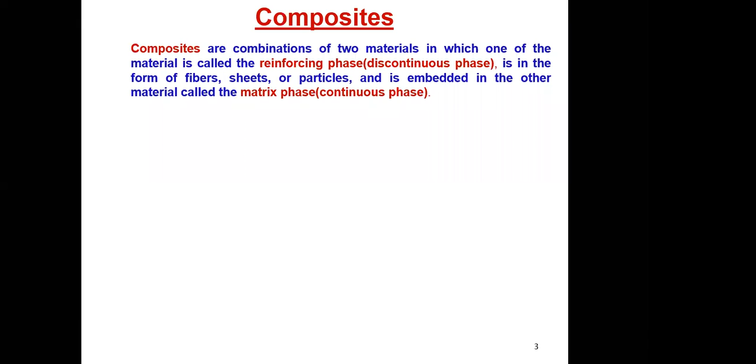So what are the functions of the reinforcement and matrix? We should know all these things before going through this presentation. Basic concepts should be clear. So I will explain the components of composite materials. Firstly, the reinforcement. Reinforcement may be glass, carbon, organic, boron. I think you have heard about glass fiber, Kevlar fiber for the military industry. These materials are used in aircraft industries also.

So matrix material, what is the function, what are the properties of these components? It is also a very important thing. Matrix may be polymer, metal, or ceramic, but my work is based on polymer based composite. So I will give a brief description of polymer based composites.

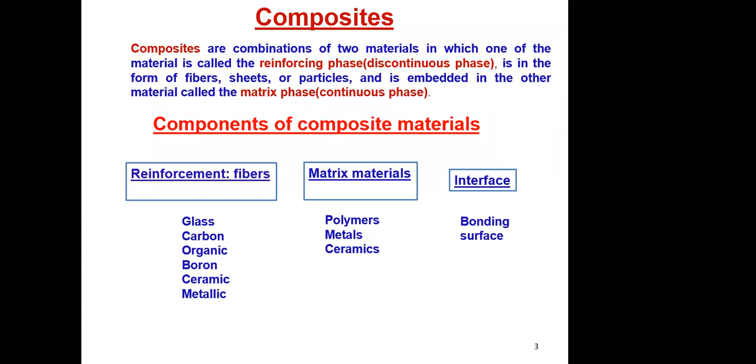So firstly we should know the function of the reinforcement. The main purpose of reinforcement is to increase the strength and stiffness of the composite. As for the matrix, its main purpose is to act as a bonding element and also protect the reinforcement from external stresses and disturbances, and its main function is to transfer and distribute the load to the reinforcement.

And during development of these composites, some filler and additive materials are added to enhance their properties. The basic purpose of using these additives is to modify the color, reduce the cost, decrease shrinkage, modify electrical and thermal properties, improve resistance to aging, and also modify the density of materials.

So composite materials are not new materials. These are old materials, because there are examples like human bones and wood, which are naturally occurring composite materials. And you have seen in villages agricultural waste and leaves mixed with mud for making the walls of village houses. So you cannot say these are new materials; these are old materials.

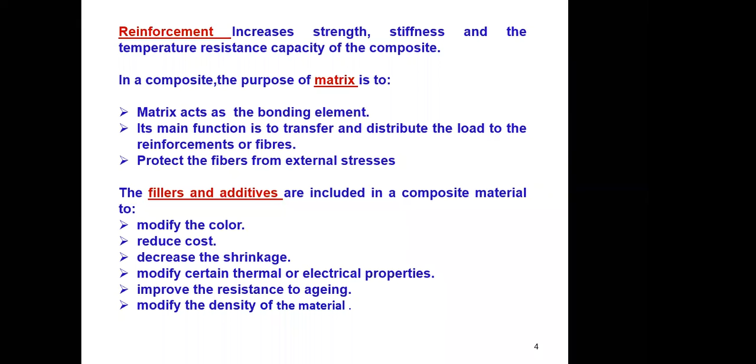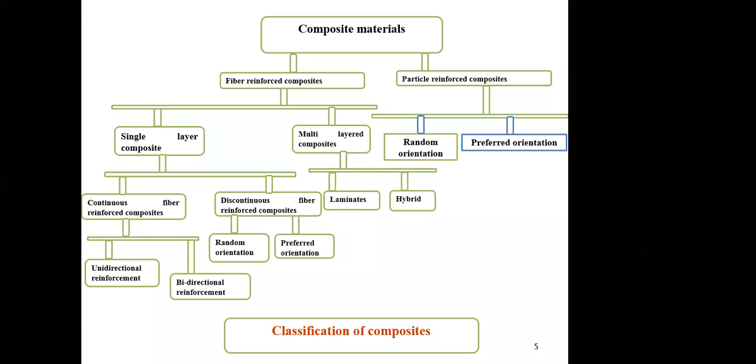So when we talk about composite materials, we need to understand the definition, constituents, components, properties, engineering applications, and also a comparative study between traditional and conventional materials. These are some classifications of composite materials. This classification is based on the reinforcement. And why composite materials? I have already told you about the requirement of composite materials.

So if we propose or develop a new material, there should be some novel thought. We have to prove this material is better than existing material. So the developed composite material should have some novel thought and also some benefits, some advantages. Maybe cost may be reduced, strength and stiffness need to be increased, fatigue life should be increased, and the most important thing is to reduce the weight of the component.

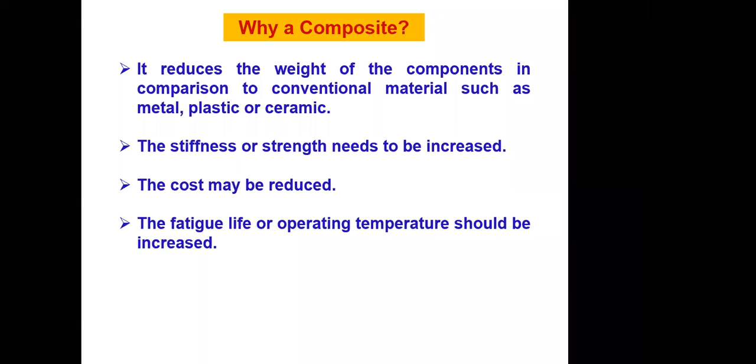Nowadays researchers prefer lightweight components, lightweight materials, so that fuel consumption gets reduced and expenses are also reduced. So the properties of these composite constituents, the matrix properties, are different from the reinforcement properties. We should have knowledge about this before fabrication of any kind of composite.

There are types of composites based on the matrix. The first one is PMC, that is polymer matrix composite, then metal matrix composite, and the last one is ceramic matrix composite. And in polymer matrix composite, you know the polymer is also plastic.

Scientific name is polymer, but in engineering terms we say these polymer plastic. And nowadays everywhere around us we can see different kinds of plastic, like switchboards, the cameras that recorded this presentation; there is some glass used which is also made of non-metallic material. You should be able to understand the polymer. We are not going to study the polymer itself, but polymer based composite, so basic terms and basic concepts should be clear.

So that's why: what is the polymer? It is the long chain formation of monomers polymerized to make the polymer. I think you have studied in chemistry at 12th class level what the polymer is, and here I am studying composites, matrix composites. I have told you about the matrix and polymer. So let me introduce the basic aspects of these composite materials.

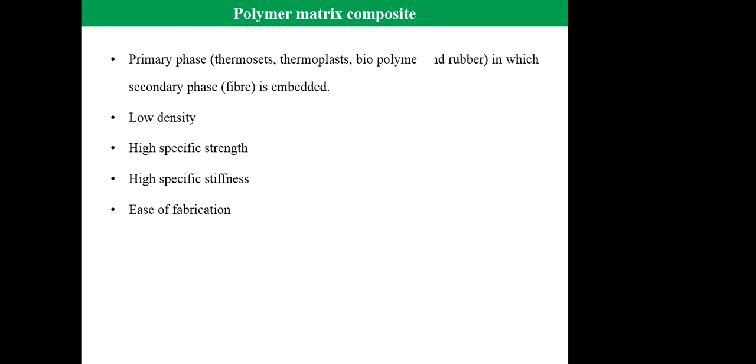These polymer matrix composites offer low density, high specific strength, high specific stiffness, and easy fabrication. Fabrication is easy as compared to other kinds of composite materials and metallic materials. The main motto is to fabricate the green composite, biocomposite. For fabrication, we need raw materials, reinforcement. So reinforcement, like natural fiber, is achieved from different kinds of plants. These are some sources, plants and animals, from which we can get the natural fibers.

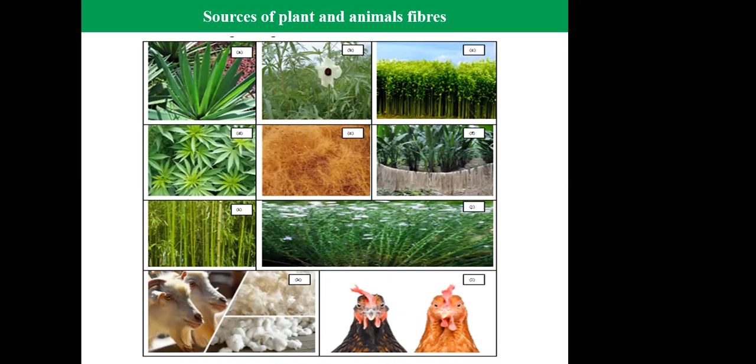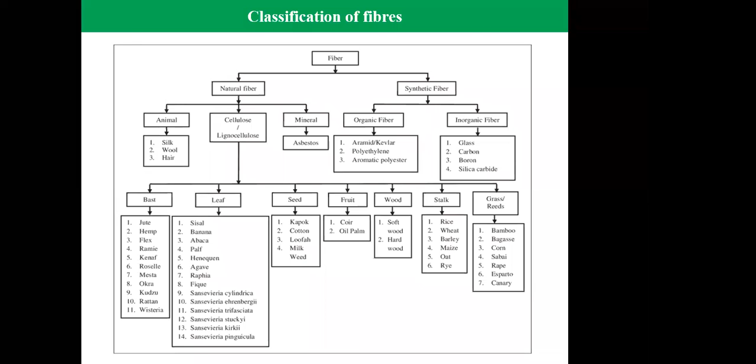Why we prefer these materials, why we prefer the green composite, biocomposite: the main purpose of using this kind of material is biodegradability, because these kinds of material do not take too much time for the disposal process. But if we use the synthetic fiber, some time ago the government said to ban the plastic. These are hazardous for human beings as well as animals. So synthetic fibers are not preferable in place of natural fiber.

Natural fibers have taken the attention of researchers over the last few years, because there are some attractive, favorable properties like eco-friendly, low cost, high specific properties. In view of development of eco-friendly and environmentally friendly materials for sustainable products, researchers are trying their best to minimize the use of synthetic based polymer composites. Synthetic fibers have also proven their worth as weight saving materials and are used in automobile, military industry, and aircraft industries also.

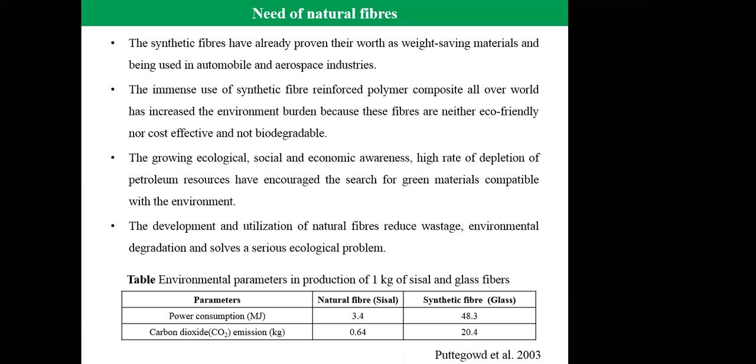Same as we know, our trees take the carbon dioxide gas and they leave the oxygen. So carbon dioxide emission is more in case of synthetic fiber during production. 20 kg CO2 is emitted during the production of glass fiber. But in case of natural fiber, this value is near about 0.6 kg, below 1 kg. So from the data you can understand very easily the benefit of using natural fiber in place of synthetic fiber. So there are some advantages in natural fiber.

So why we prefer these kind of materials. These are the renewable source of raw material, recyclable in nature, high specific strength, high specific stiffness, also good from a health and safety point of view, also less abrasive, lower cost. But there are some disadvantages also: variation in strength, hydrophilicity, and weak interface.

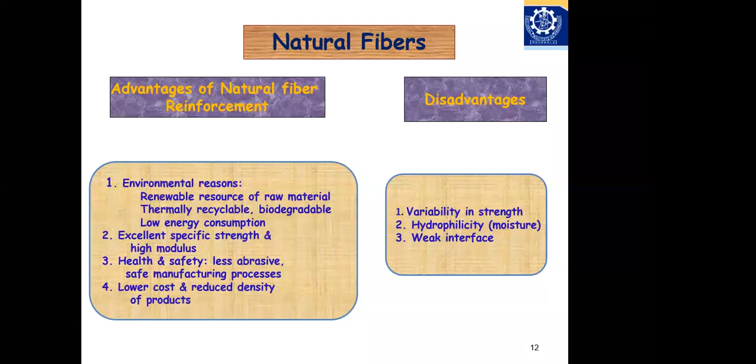As I told, these natural fibers are obtained from plants. They are hydrophilic in nature. That means they absorb the water. But if we talk about the matrix polymers, they are hydrophobic in nature. So interfacial bonding and adhesion is poor during the production. After developing the composite, there is some issue. So there are some drawbacks I will discuss. For overcoming these drawbacks, I will do some surface modification also.

These are the advantages of natural fibers. As we see, the non-irritating nature of the natural fiber makes it safer and easier to handle. But synthetic fibers are irritating in nature. Wearing clothes made of synthetic fiber is also health hazardous. Less energy consumption, as I told in the previous slide, cost effective, low density, and availability everywhere, as all over the world these fibers are available in huge amounts.

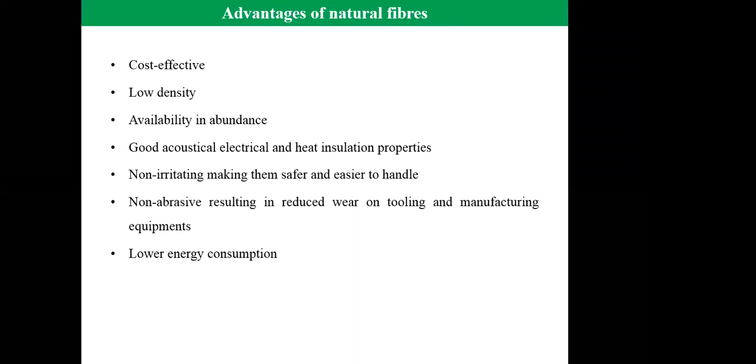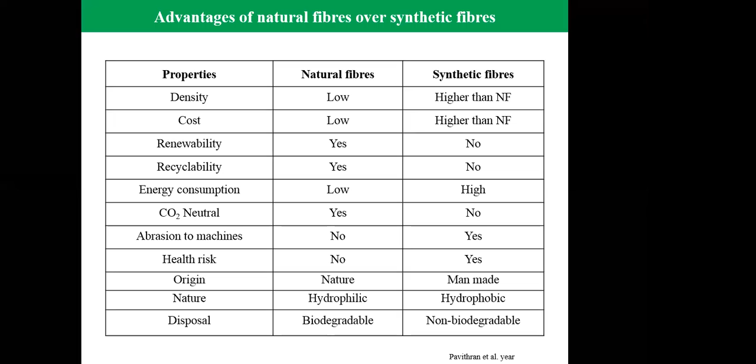Advantages of natural fiber over synthetic fiber: this is the comparison between natural fiber and synthetic fiber. Natural fiber is better in terms of density, cost is low, density is also low, CO2 neutral, energy consumption is also low, recyclable in nature. In these terms, natural fiber offers better properties as compared to the synthetic fiber.

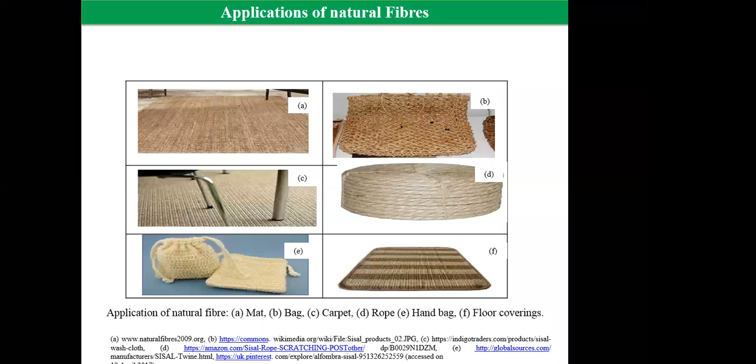These are some applications of natural fiber. You have seen them in your own house also. Doormat is made of jute, and bag, rope, handbag, carpet, floor covering, all these things are made of natural fibers. So, limitations of biocomposites. There are some limitations of natural fiber due to which it is not applicable for structural applications. But if we use some techniques, some modifications, some filler materials, these properties can improve.

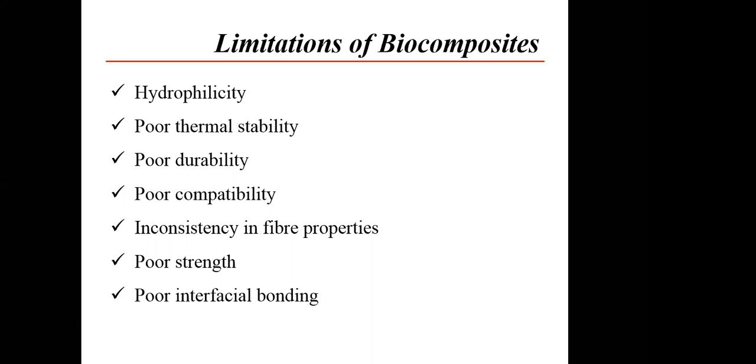Hydrophilicity: as I told, plant fibers or natural fibers attract water, they absorb water. Poor thermal stability, poor durability, poor compatibility; these natural fibers are not compatible with polymer. So for improving these things, some modification is needed. Inconsistency in fiber properties depends on harvesting time, soil properties, rainfall conditions, so uniformity is not there. Because of this, poor strength occurs, and poor interfacial bonding also. By using surface modifications, compatibilizers, hybridization techniques and fillers, we can overcome these drawbacks.

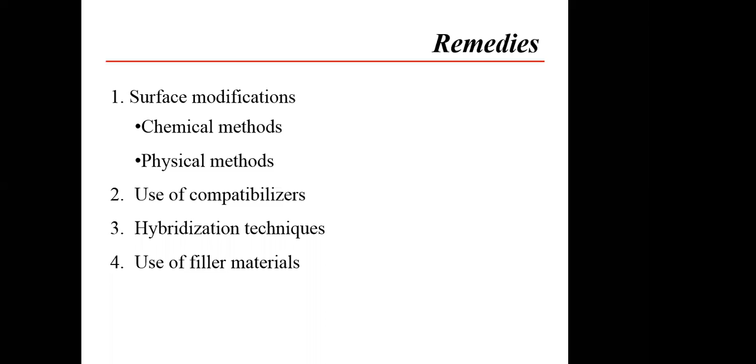Application of biocomposites. Before developing any kind of material or doing research, we should know the application of the particular product, where we can use it. So the first important aspect is selection of material for a particular application. Suppose the mouse we are using is made of plastic. It could be made of steel, metal, wax materials. Why do we use plastic for making the mouse? So design dictates which material will be suitable.

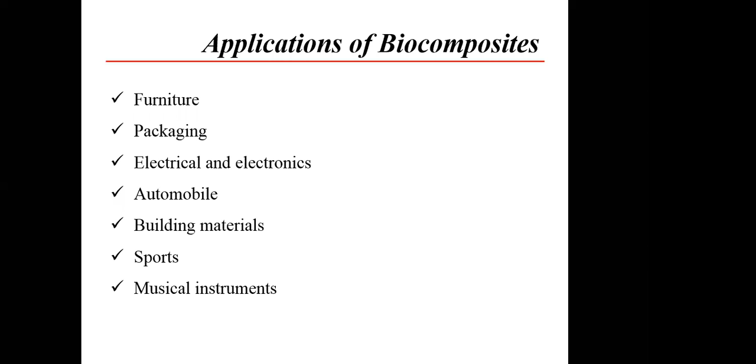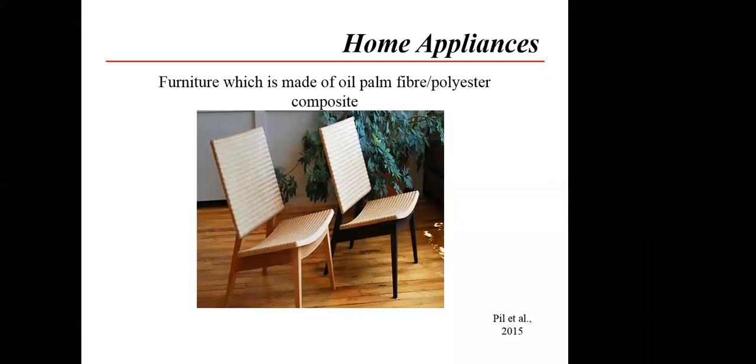Biocomposites are used in furniture, packaging applications, electrical and electronics, automobile, building materials, sports and musical instruments. A few examples are given. These materials are made of oil palm fiber polyester composites, which you have seen around us. In packaging, the sustainable packaging for cosmetic products is made of curaua fiber wood flour based composites.

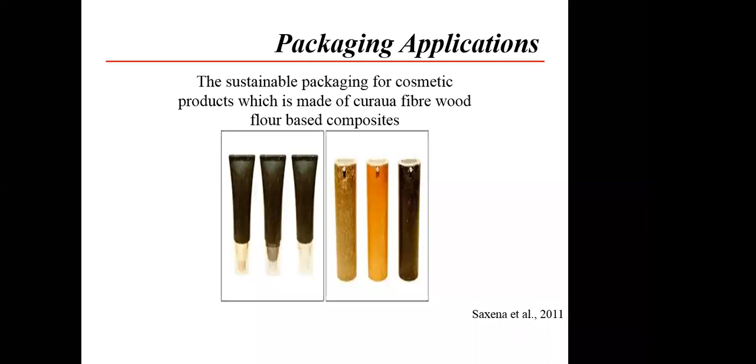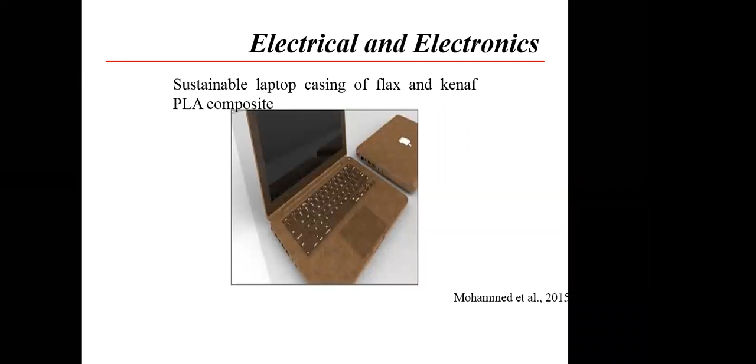Electrical and electronics: flax and kenaf polylactic acid composites are used for making laptop casings. What are the benefits? Heating issue is there, so up to which temperature we can use it, you should know all these things. Fabrication of helmet using jute polyester composites. Jute is natural fiber, polyester is thermoset plastic. Plastic is of two types, thermoplast and thermoset. I have worked on thermoset based plastic, that is epoxy.

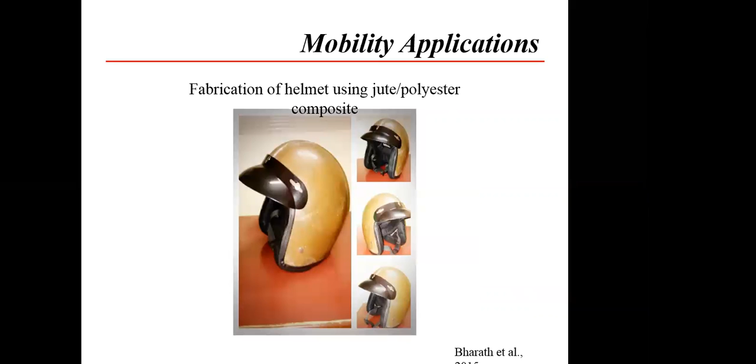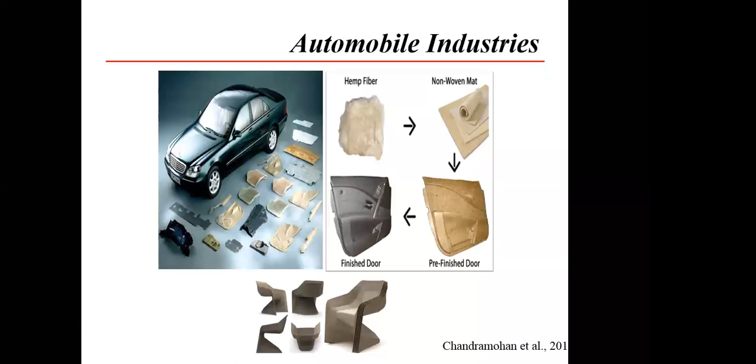Mobility application: for making the helmet, jute polyester composite is used. In automobile industries, there are components like seat cushion, door panel, floor panel, which are made of these kinds of biocomposites. Motivation: why we work on this kind of materials nowadays.

Non-degradable plastic waste and synthetic fiber cause bad impact on health as well as environment. The main motto of using these kinds of materials is that they are compatible with our environment as well as health.

In order to overcome some drawbacks, biocomposite is widely used due to its eco-friendly nature and biodegradability.

However, biocomposites are prone to moisture. They absorb moisture or water, have inferior fire resistance, lack of fiber matrix adhesion, poor wettability, and lower strength. Still, they are used and have taken the attention of researchers because of some few attractive and favorable properties. These drawbacks limit their use in outdoor and structural applications.

Therefore, to overcome these problems, surface modification of fiber is needed, which enhances the properties of biocomposite. There are a lot of surface modification methods, which may be chemical and physical. Chemical treatments are used for doing these treatments.

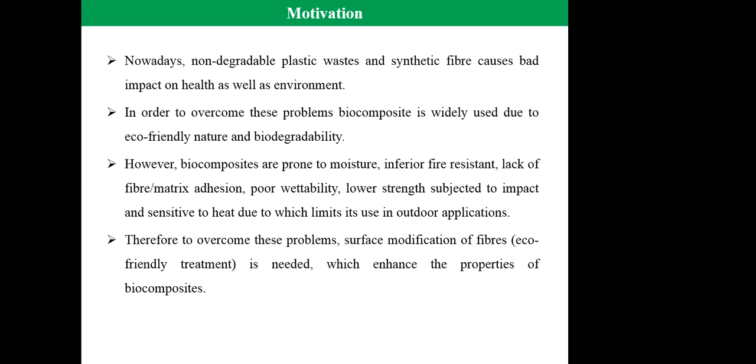Materials and method: I have taken sisal fiber as reinforcement, epoxy resin as a polymer, and polylactic acid for coating purpose for surface modification of the fiber.

After the retting process, mechanical methods are applied; this fiber is used as reinforcement, which is obtained from these plants. There are some physical and mechanical properties of the raw materials.

I have purchased sisal fiber from Uttarakhand Bamboo Board, Dehradun, epoxy from Bakhshi Brothers Kanpur, and polylactic acid from Nature-Works Chennai.

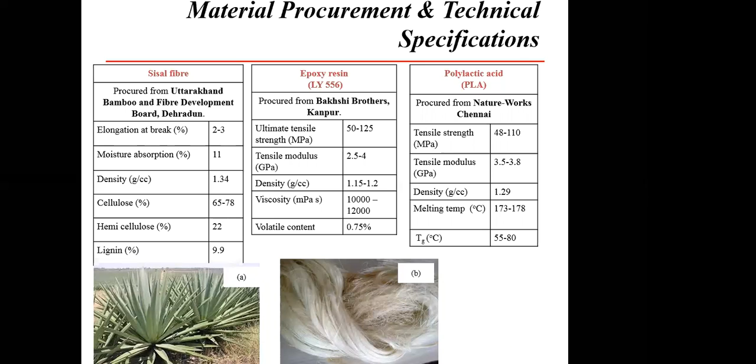Surface modification: the first technique is sodium bicarbonate. I think you have heard about sodium bicarbonate, baking soda, used in cooking food. That is also known as sodium bicarbonate in chemistry.

This treatment is not health hazardous. Because of this nature, we prefer eco-friendly treatment. There are some steps which I have followed for treatment.

A solution of sodium bicarbonate and distilled water was prepared with varying concentration. I checked which concentration provides the optimum result.

Sisal fibers were soaked into the solution for a period of 24 to 120 hours. The solution was stirred at regular intervals of 1 hour during the treatment period, and fiber were removed from the solution at constant time intervals: 24, 48, 72, 96, and 120 hours.

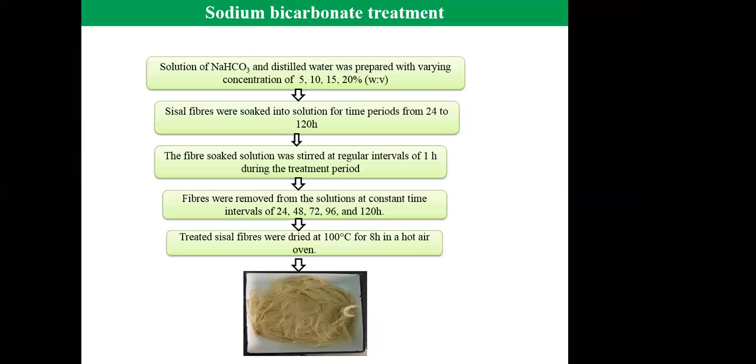After that, these fibers were kept in a hot air oven at 100 degrees Celsius for 8 hours. These treated fibers were again coated using PLA, polylactic acid.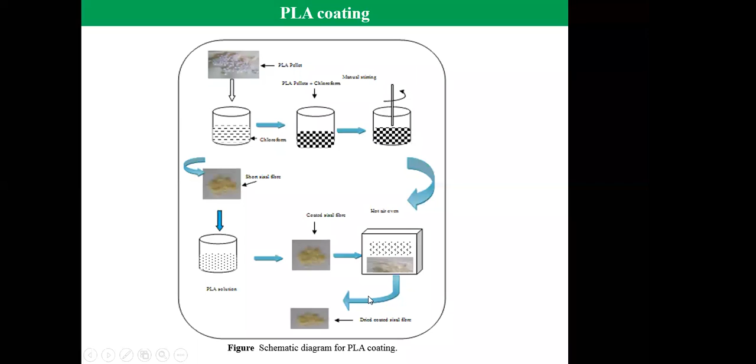Thereafter, these coated fibers were kept into a hot air oven and dried. The coated fiber images are given in this type. For preparation of biocomposites, I have used a 15 mm fiber length.

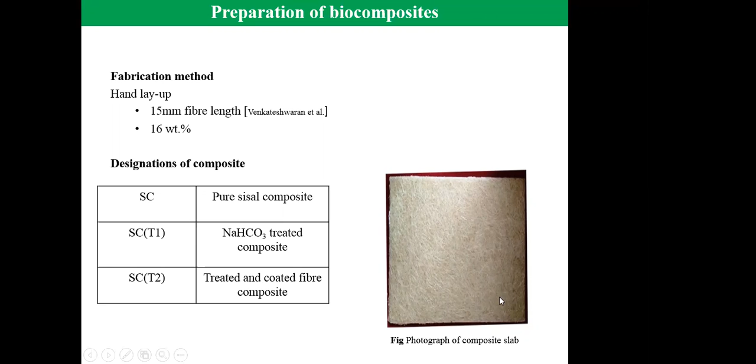I have chopped these fibers into 15 mm length, and these are the designations of the composites. The fabrication method involves preparing this composite slab, and samples are prepared using this slab.

Results and discussion: firstly, I have characterized the sisal fibers, thereafter the composites. I have done the tensile test on a Tinius Olsen machine at MIT Allahabad.

We can see from the table that the optimum value is obtained at 10% of NaHCO3, sodium bicarbonate, and the immersion time for the optimum result is 96 hours. This concentration of NaHCO3 and immersion time provides the optimum results of tensile strength.

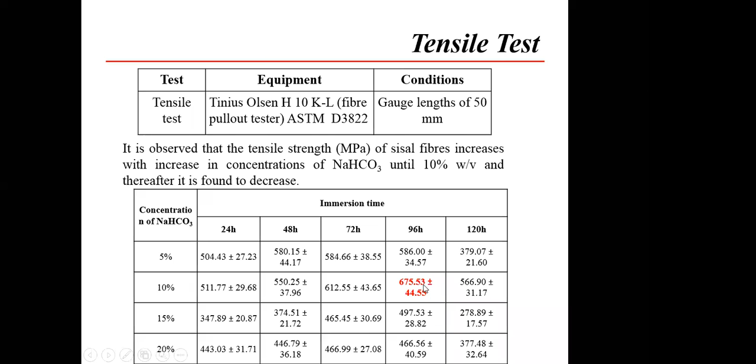After treatment, we have done the coating on the fiber. At 2% coating, a higher value of tensile strength is obtained, and thereafter the values decrease because of the treatment.

After treatment, some hemicellulose is removed from the surface of the fiber, due to which properties get declined.

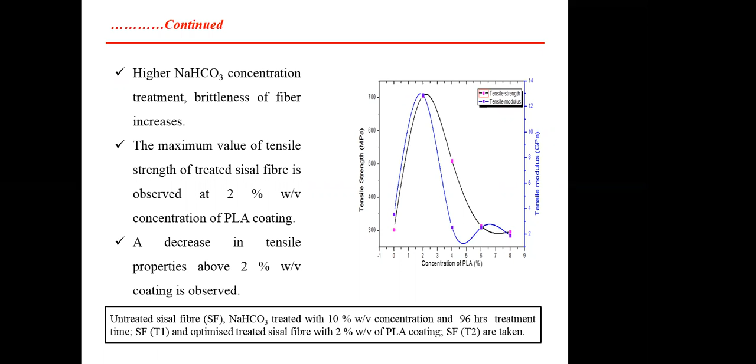Scanning electron microscopy is done at IIT Kanpur. The first figure, A, shows some fiber cells with impurities, and after sodium bicarbonate treatment we get fibrillation taking place. Fibrillation occurs because the surface gets rough.

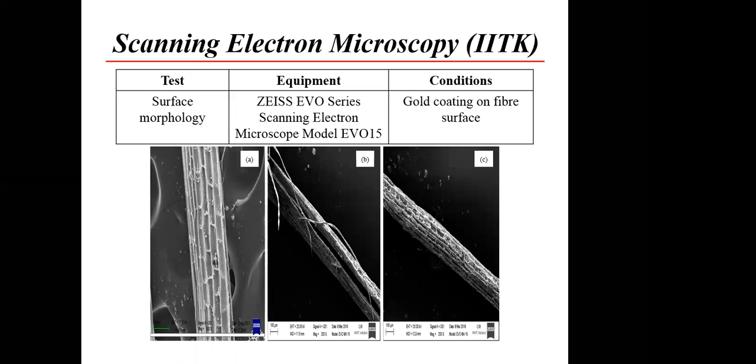If the surface is rough, that means more bonding takes place. Good interfacial bonding between fiber and matrix will be achieved after treatment or coating. EDX analysis was also done at Kanpur.

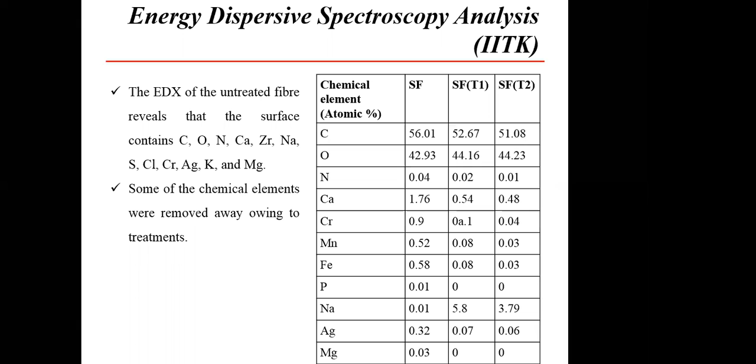If we talk about the untreated fiber, a lot of metals and chemical elements are available, but after treatment, few of them are removed because of the treatment.

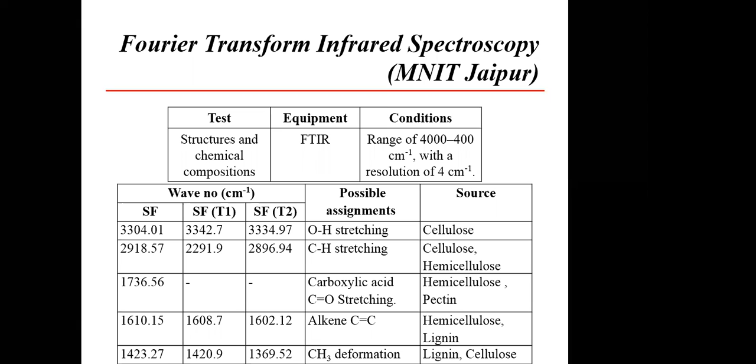FTIR spectroscopy is done at MNIT Jaipur. It is used for identifying the chemical composition and structure. There are some possible assignments which confirm the presence of cellulose and hemicellulose in the fiber. This test is carried out to verify the absence and presence of these constituents.

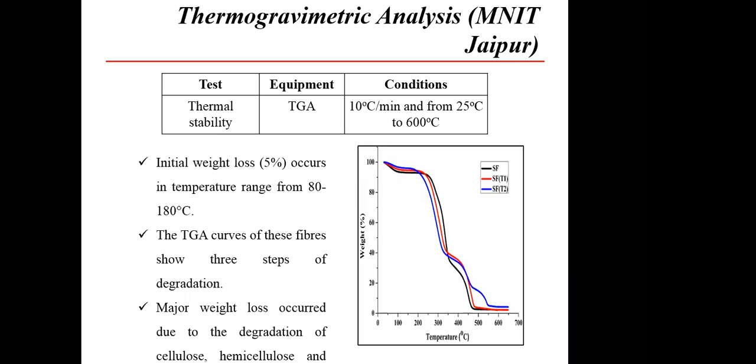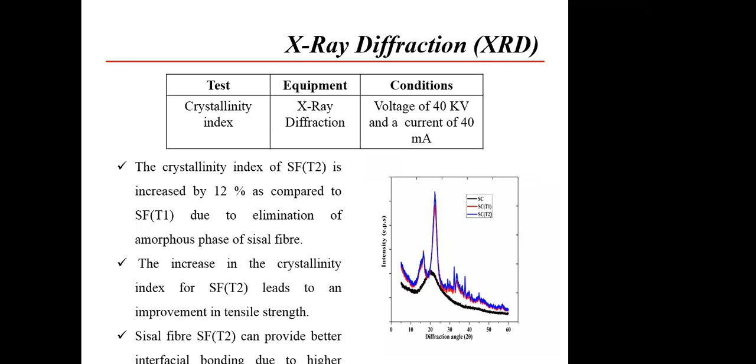X-ray diffraction (XRD) is conducted at MNNIT Allahabad for measuring the crystallinity index. As we see in the diagram, untreated sisal fiber has a lower peak compared to SCT1 and SCT2, that is after sodium bicarbonate treatment and also after polylactic acid coating.

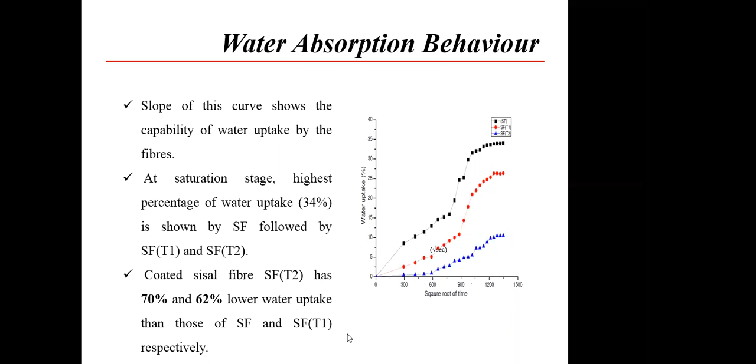Now I am going to discuss the dynamic mechanical analysis. What do you mean by dynamic mechanical analysis? It is an effective tool for determining the viscoelastic properties of crystalline polymers and composite materials.

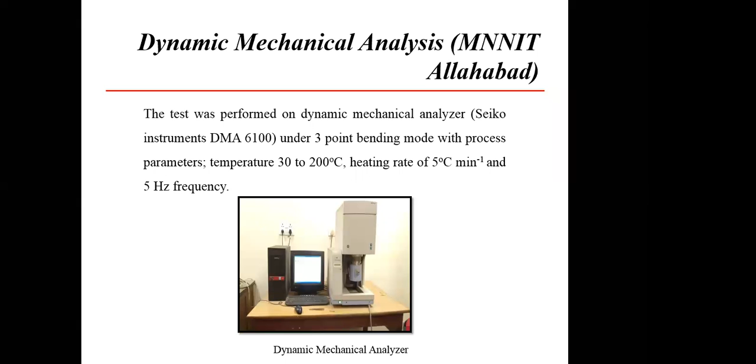There are three basic terms: storage modulus, loss modulus, and tan delta. DMA is also used for measuring the glass transition temperature. So what is the glass transition temperature?

If we use these developed composite materials in packaging applications, suppose we are using these materials in food packaging, there are various issues like temperature differences. Temperature variations all over India are not constant - in some places there is not too much cold, and in some places it is always warm. So if we use it in packaging applications, we should know about the glass transition temperature of the particular product.

So glass transition temperature is the temperature range where a thermosetting polymer changes its state from glassy state to rubbery state. It is different from the melting point temperature. At melting point, the material begins to melt, but at glass transition temperature, the material gets softer, melting does not start.

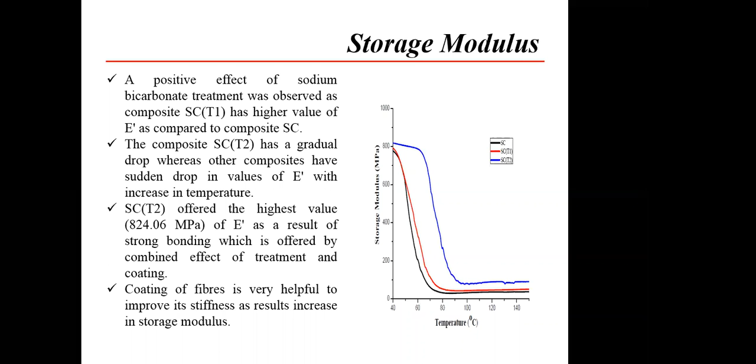We can see the blue curve is shown after the treatment, SCT2. This composite presents a good storage modulus compared to the other two. So coating of the fiber is very useful to improve the stiffness as well as the storage capability, resulting in an increase in storage modulus.

The second important parameter is loss modulus, which dictates the viscous response of the material. We can understand this by an example: when a ball is allowed to bounce, it results in some energy being dissipated and some energy saved for future use. If a ball is bounced freely, it will not attain its original position - some energy will be dissipated and some energy will be saved for future.

So the energy that is dissipated is the loss modulus, and the energy saved for future use is the storage modulus. We can get the value of glass transition temperature from the loss modulus curve, which is plotted as variation in loss modulus with respect to temperature.

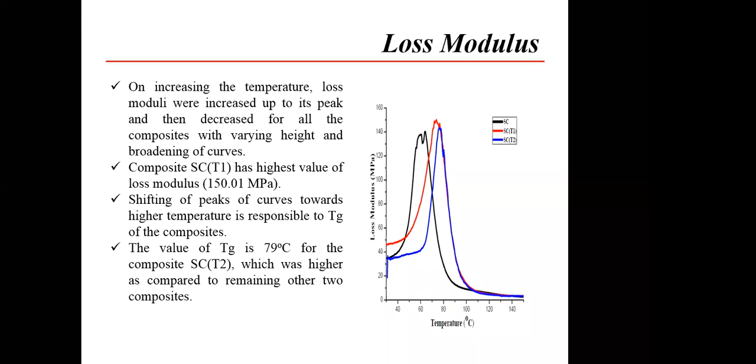In summer, the weather environment temperature is near about 45 degrees Celsius. So TG, glass transition temperature, means up to this temperature the material can sustain.

After going above this temperature, the material changes its state from glassy state to rubbery state and becomes softer. So this is not applicable above 56 degrees Celsius. In case of SCT2, we can use it up to 78 degrees Celsius.

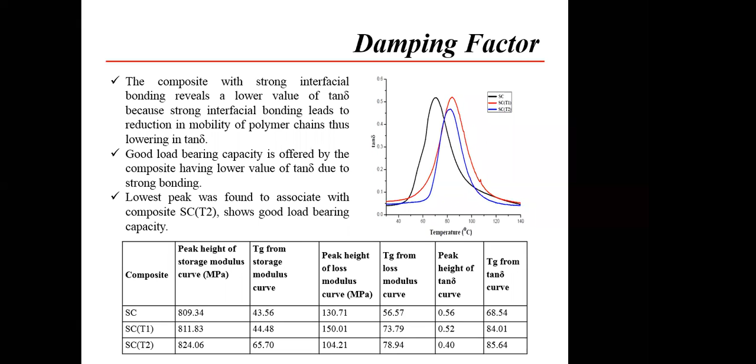Damping factor, tan delta, is defined as the ratio of loss modulus and storage modulus. So these are three parameters which are temperature dependent and provide information about the interfacial bonding between the fiber and matrix. Basically, DMA, dynamic mechanical analysis, also predicts the effect of time and temperature on polymer viscoelastic properties under different environments.

These are some conclusions. So after treatment, after coating, after modification, the results obtained show enhancement in properties. Thank you.